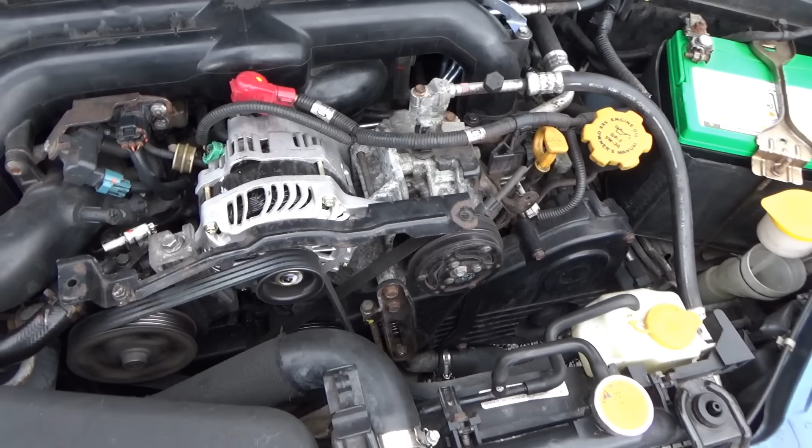Hook up the alternator. Wow. Okay, unhook it. Customer complaint confirmed. That's crazy. I've never seen this before on any vehicle.

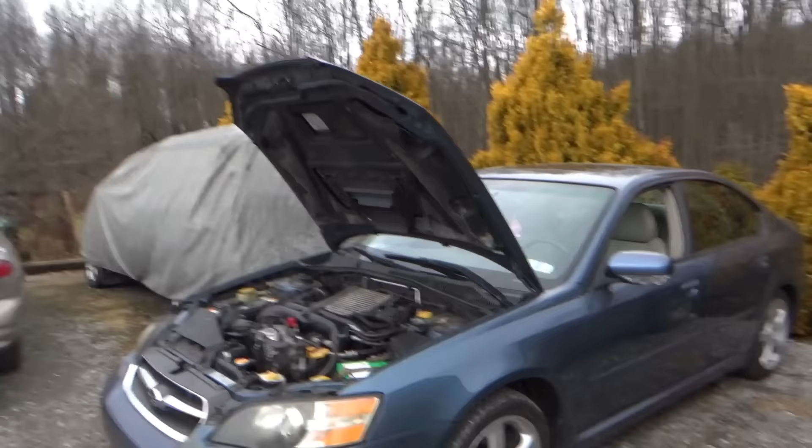So let's fire it up. And they said this connector right here, if you leave it unplugged, it runs fine. It runs smooth. Obviously it doesn't charge. Once you hook that up, well, you'll see in a second.

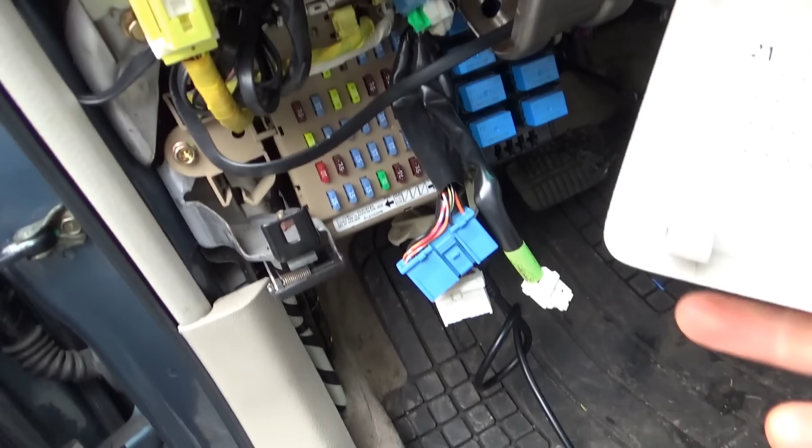Another note was it has a parasitic battery drain, and the owner tells me that if you pull out this 15 amp B unit B plus fuse right there, the draw apparently goes away. So that's the information I have.

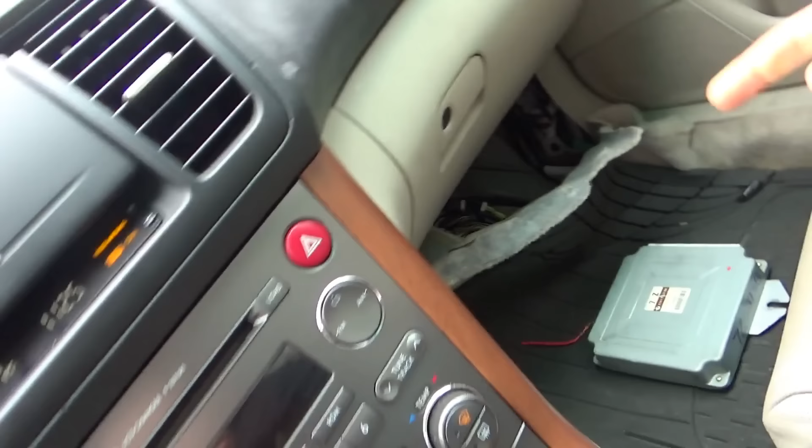Let's start it up. By the way, he said they replaced the engine computer with a junkyard one, again, no difference, and apparently this one's not original either. So, like I said, this car has a long history. So let's fire it up.

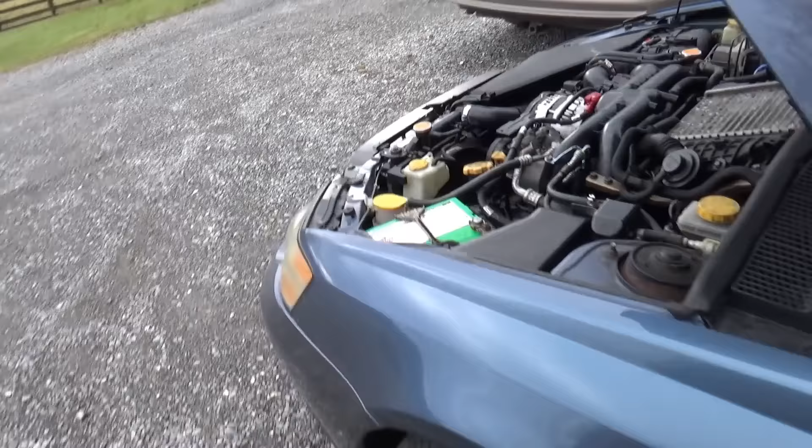Sounds just normal, sounds fine. Hook up the alternator. Wow. Okay, unhook it. Customer complaint confirmed. That's crazy. I've never seen this before on any vehicle.

Let's scan it for codes, just to get that out of the way, health report. And then look up a wiring diagram and see what this charging system is, how it's laid out. But what the heck is going on with this Subaru?

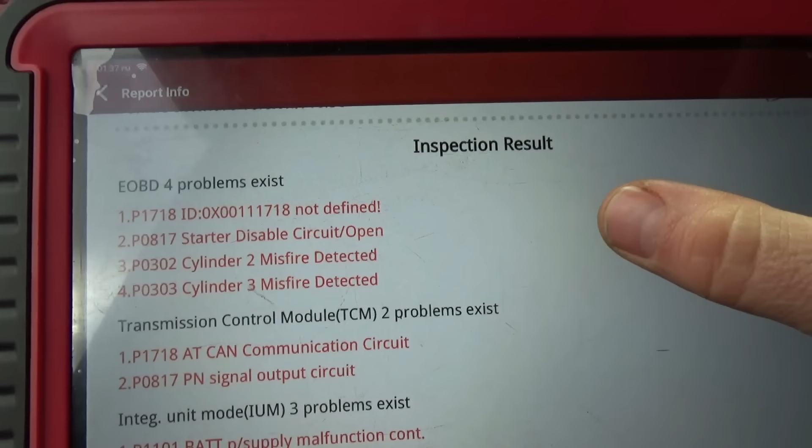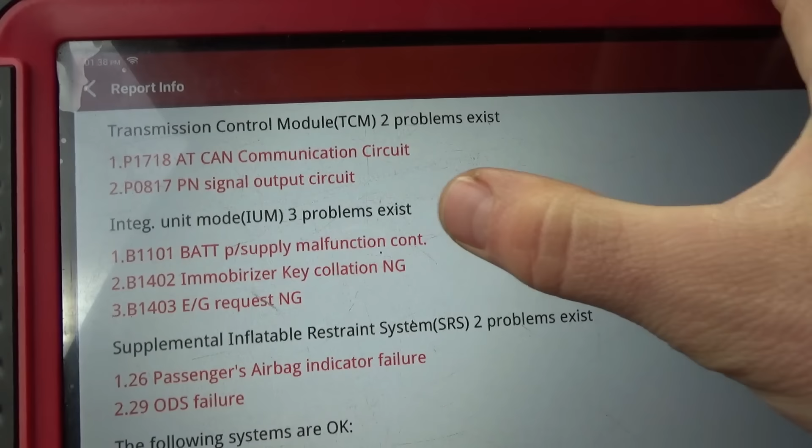Alright, we're inside my office here. So, full code scan. Cylinder 2 and 3 misfire detected, communication circuit, battery power supply malfunction. Okay, fine, not too interesting.

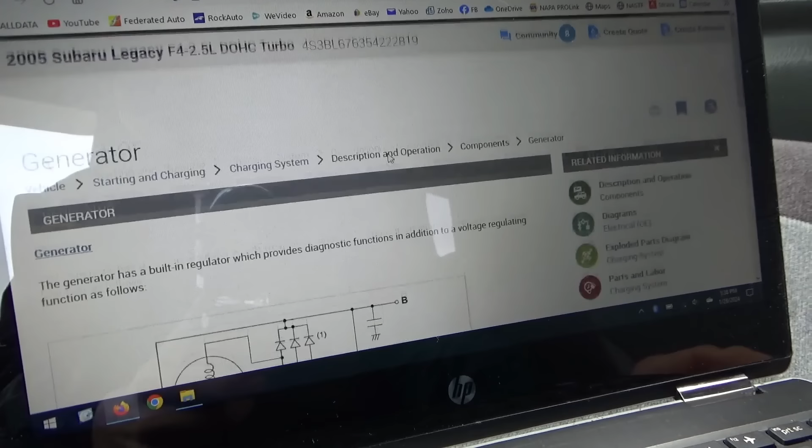Pull up some service info on ALLDATA. Here's our charging system description: alternator, the regulator, the main battery positive cable, and 2 terminals L and S. So we need a wiring diagram. Here it is, charging circuit. So there's our alternator, the fat cable, and then 1, 2, 3 wires on the control circuit. And it says this is for a 3-liter. That's not what we have, so we should only have 2 wires, I guess.

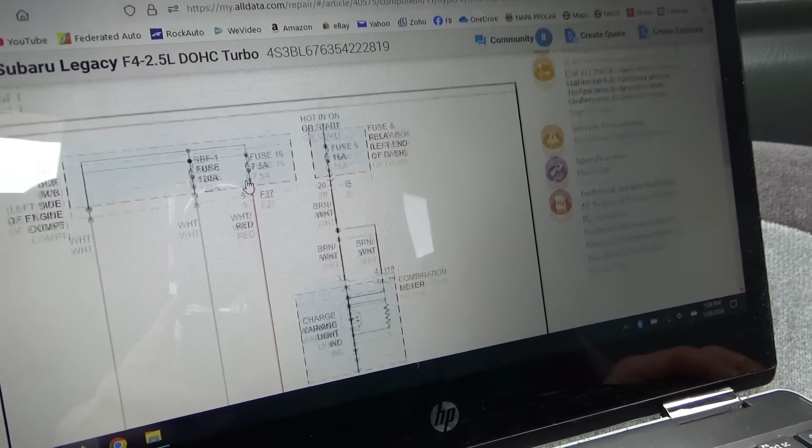One of them goes to a fuse, hot at all times, 7.5 amp, fuse 16 in the main fuse box, engine side, under the hood. And then there's our charge warning light, brown and white wire.

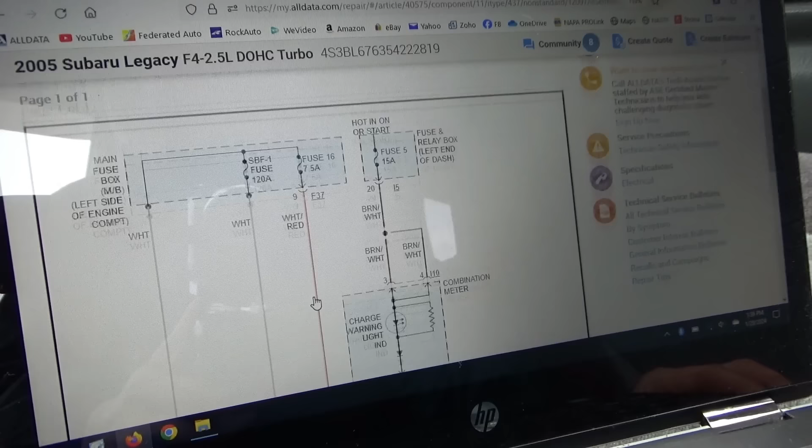So let's pull up the OE diagram, make sure we don't have this third wire on there. This is a pretty simple schematic. It's not computer controlled. I guess on the 6-cylinder it might be, but it shouldn't have anything to do with the computer. So why is it running really poorly? My gut feeling says, is there a massive ripple coming out of this aftermarket alternator? Perhaps. We'll get the scope out, see what happens when we plug in that connector while it's running.

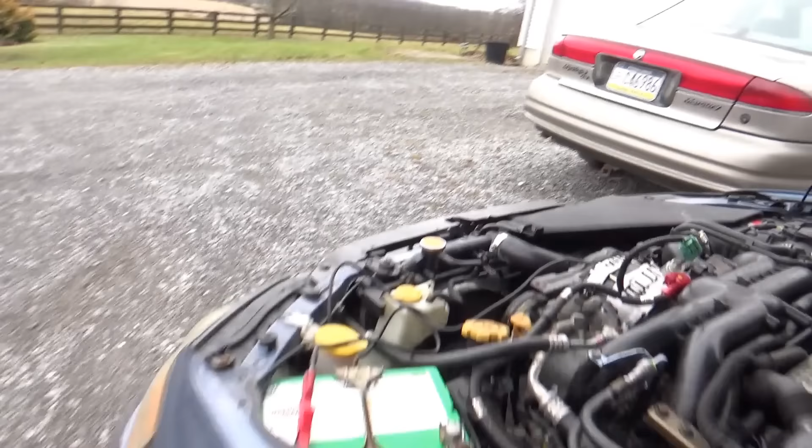Pretty crazy stuff. Alright, so with the key on, test light to battery ground, you can see it's a dim light on the brown and white wire, which is for the battery warning light. There's the battery warning light right there. If we take the test light away, that battery warning light should disappear. Indeed it does. And then the middle pin, we should have a bright light, power at all times.

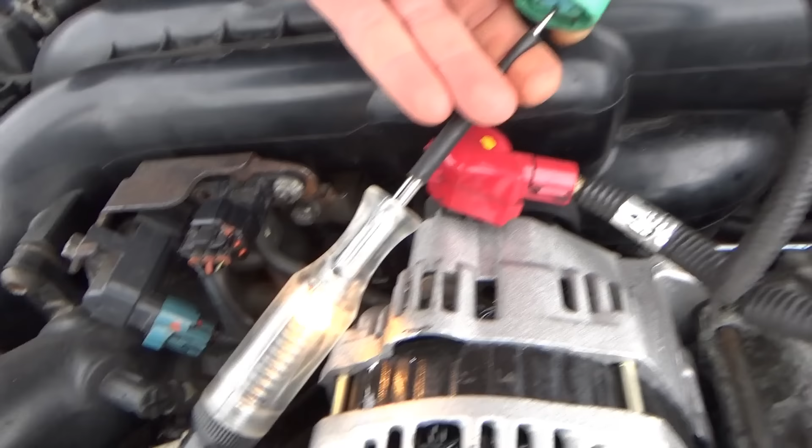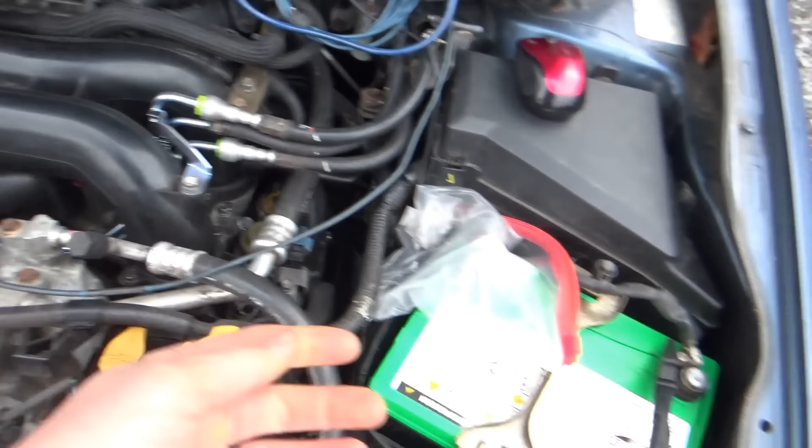Yes, that's there. Next check is, let's put a scope right on this post right here. Okay, so scope, just one channel hooked up to the battery positive post, negative on the negative battery terminal. We're at 12 volts right now, nice and steady. Let's run it, connect that connector, and see what happens to our main system voltage. Let's see.

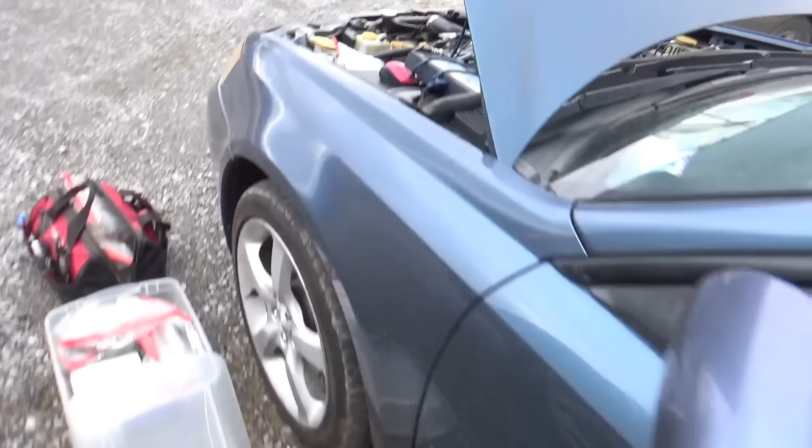Ready? Let me rev it up a little bit. System voltage did go up. Seems like it's only running on 2 cylinders. And unhook it. Nice and smooth.

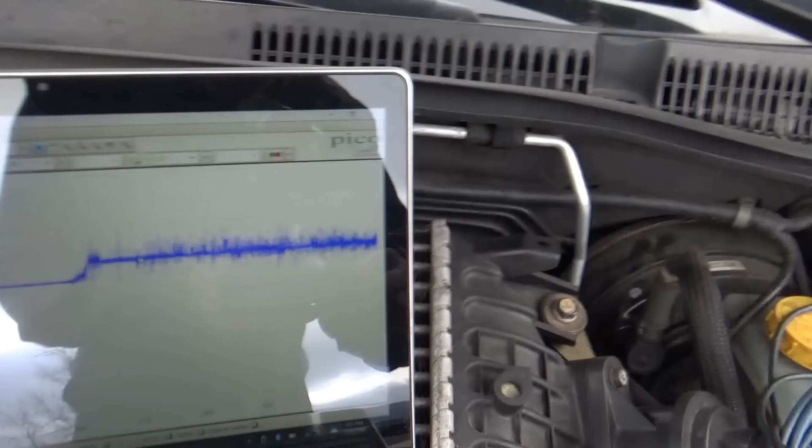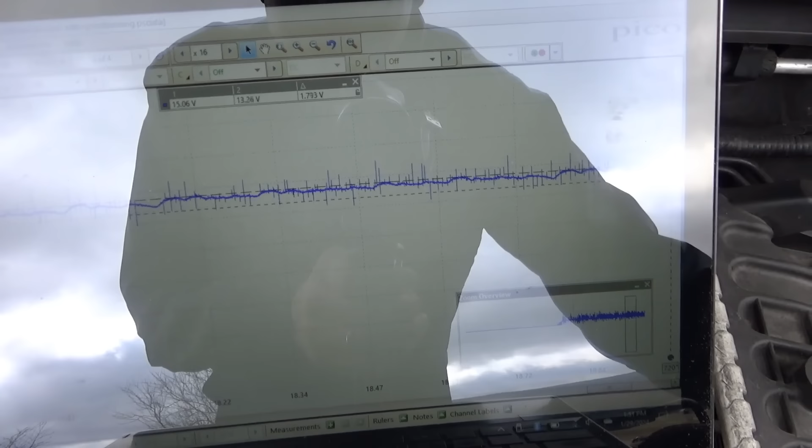Alright, okay, so the alternator seems to be doing what it's supposed to. There's no excessive ripple or anything. So you can measure the highs and the lows here. About 15 volts. That should be 14.3. Let's go to the next screen.

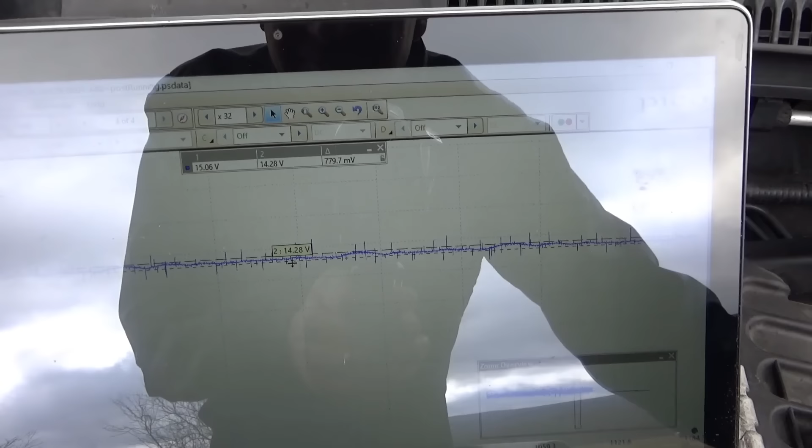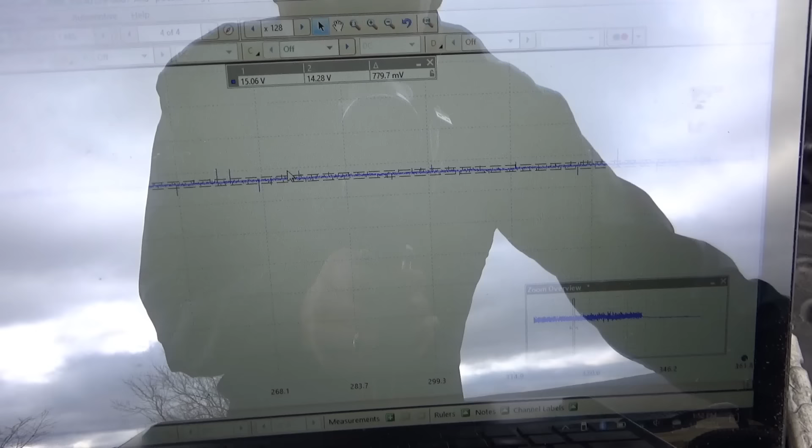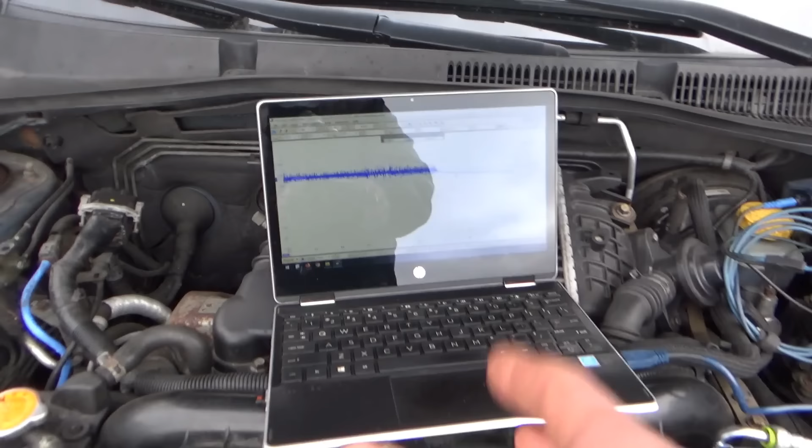This is where I revved it up. The engine's running really poorly, keep in mind, so the voltage could fluctuate a little bit, but it's not going above 15, about 14.5 volts. No excessive noise or spikes or anything. Like right here, it looks pretty smooth, doesn't it? Where it runs really poorly, the RPMs drop, so the alternator output is also dropping. That's not a diode going bad or a severe ripple or something.

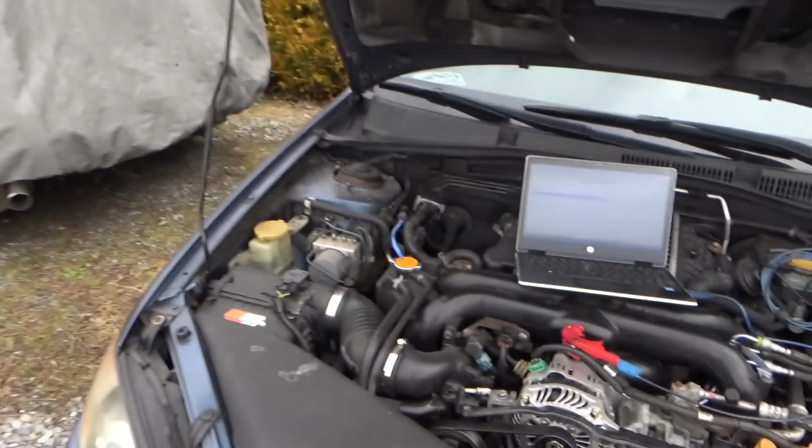So what is the next step in the diagnosis? We figure out what's going on with the input for the fuel injection and ignition systems. So the crankshaft position sensor lives right under the alternator, right here. Now we didn't have a code for crankshaft position sensor or anything like that, but we have access to the engine computer right here by the passenger's feet.

So I want to measure that, and maybe a ramp of the ignition coils. If we see 4 even humps, then it's running smoothly. If it's all over the place, we'll see if something's being interrupted, possibly from a messed up crankshaft position sensor signal. So that'll be my next check.

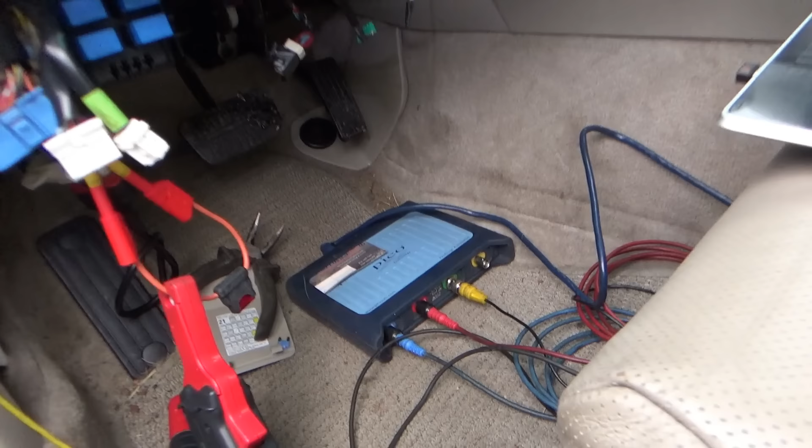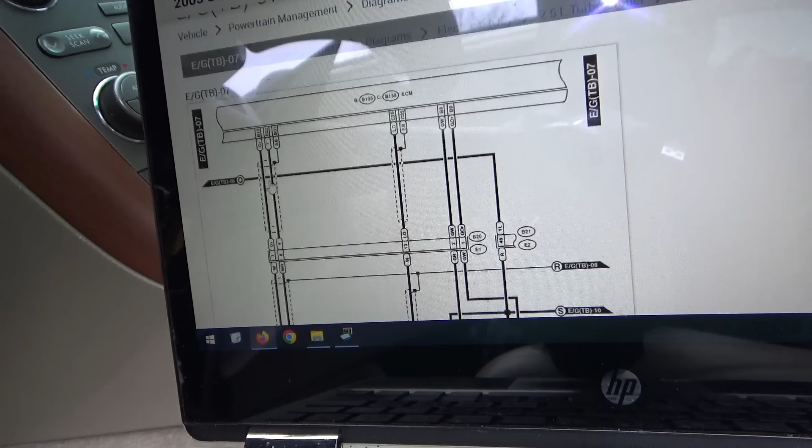Right, ready for the next experiment. Picoscope's hooked up, 3 channels. Channel 1 and 2 I have on the crankshaft position sensor wires. This is a 2-wire CKP, I guess it's a variable reluctance sensor. You should see it like a sine wave. Both of these wires go to the ECM. So I have channel 1 on the orange wire, B10, channel 2 on the yellow wire, B22. They're right there at the engine computer.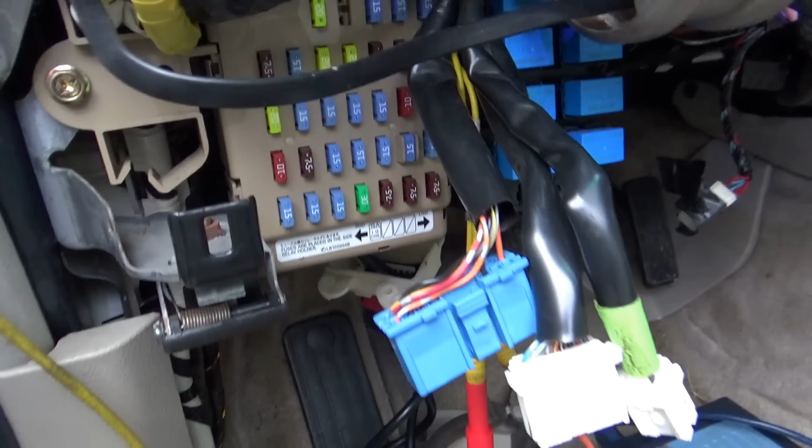Third channel is an amp clamp on the fuse that feeds the ignition coils. You have 4 ignition coils, and the power feed comes from fuse 12, 15 amp. So I want to see when we start the car with the alternator unplugged, nice even coil ramps, nice crankshaft position sensor signal. So let's just fire it up, see what happens.

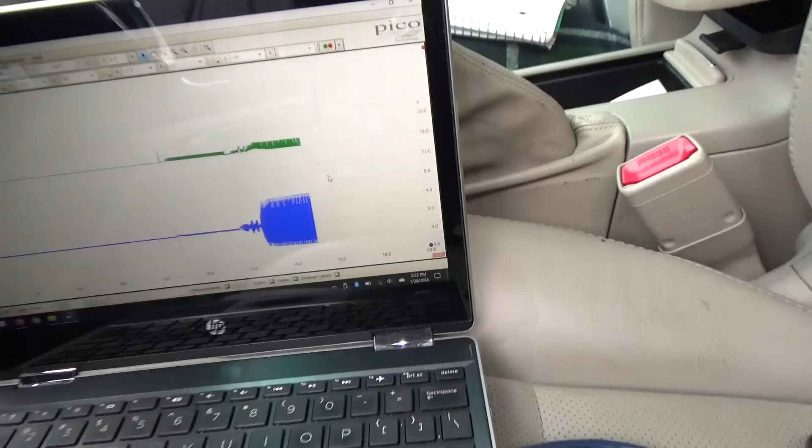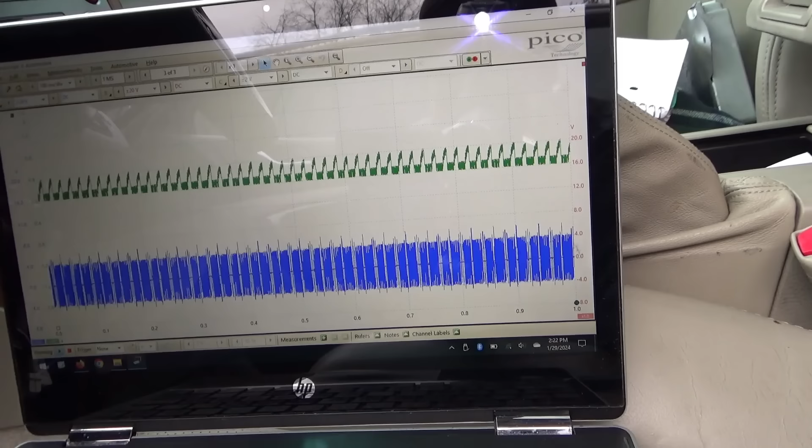Let's bump up or turn down the scale. Yep, we see nice coil ramps. There's our CKP signal, and I guess channel 2 is a ground. If we stop the recording, there it is. Okay, great.

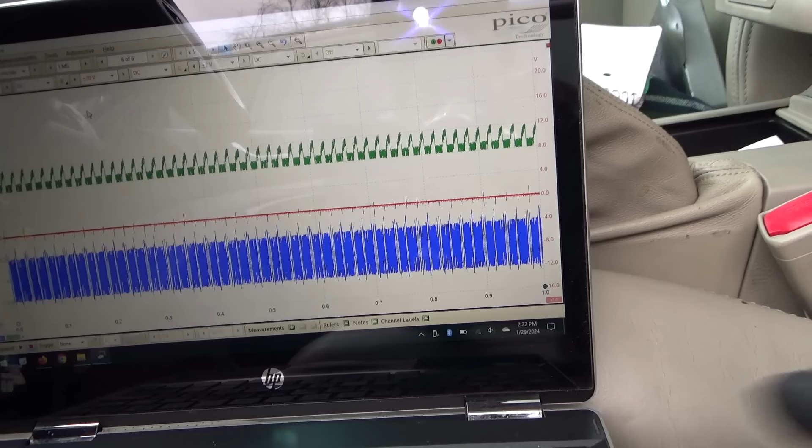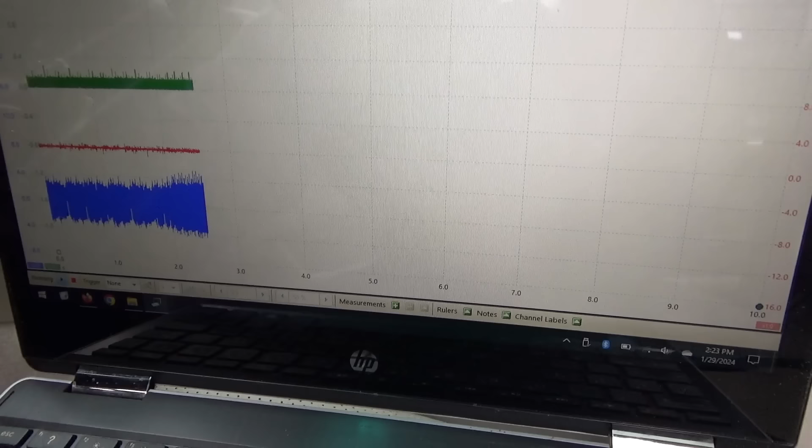I'm going to bump the time scale up again. Let's rev it up. Plug in the alternator, see what changes. Car is barely running. And we'll shut it off.

So where did we plug in the alternator here? It was running nice and smooth. See nice coil ramps right there.

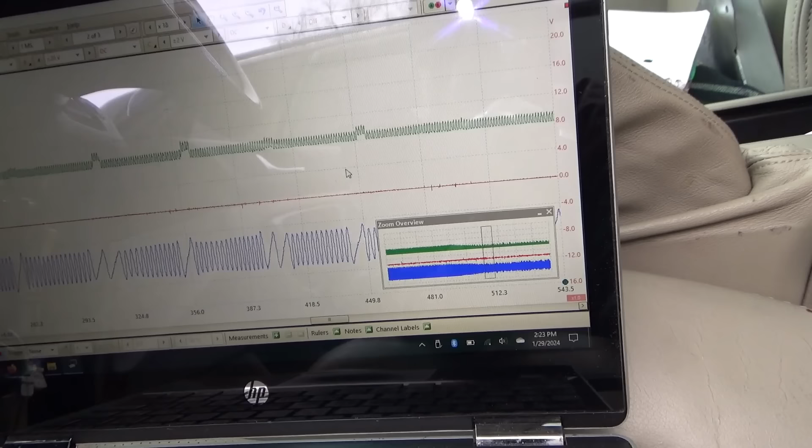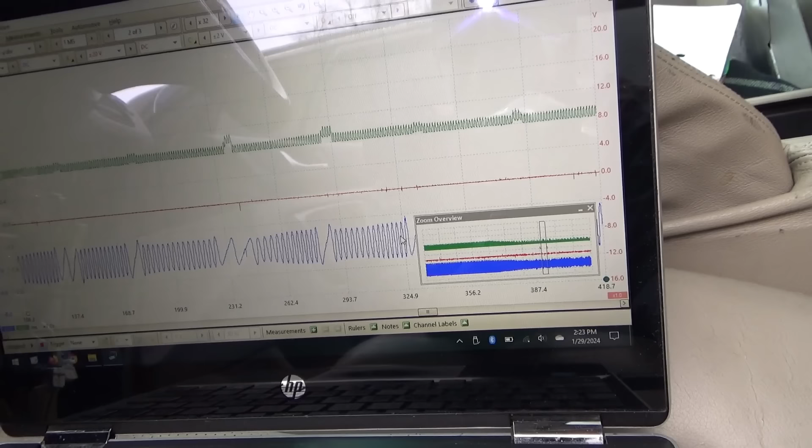Did the crankshaft position sensor signal change at all? So we have 1, 3, 1, 3, 1, 3. Doesn't look like it changed much, it just got weaker for sure. What happened to our engine computer? You can see the coil ramps are now boom, boom, and then kind of missing, or weak and weak. 1, 2, weak, weak. This is no good.

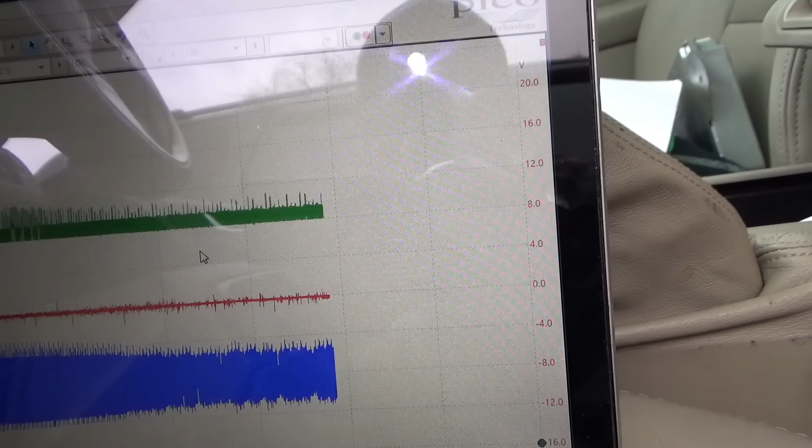Very, very neat, I like it. Like I said, crazy Subaru. What would cause this?

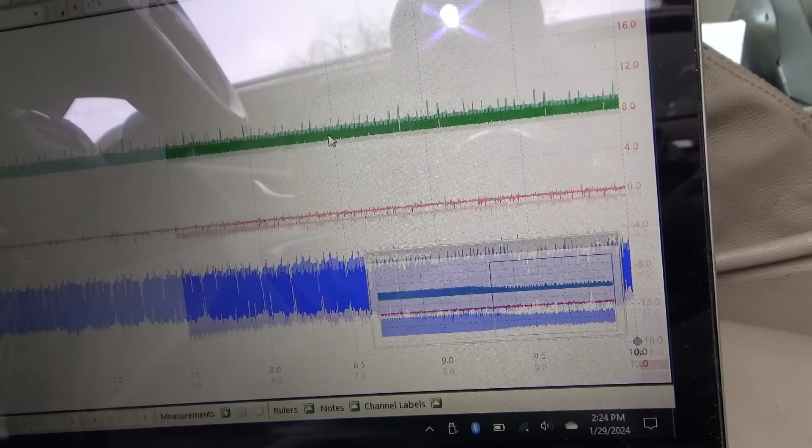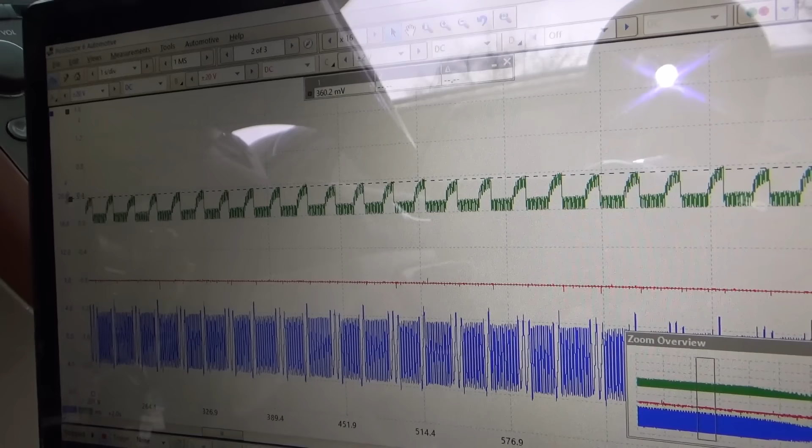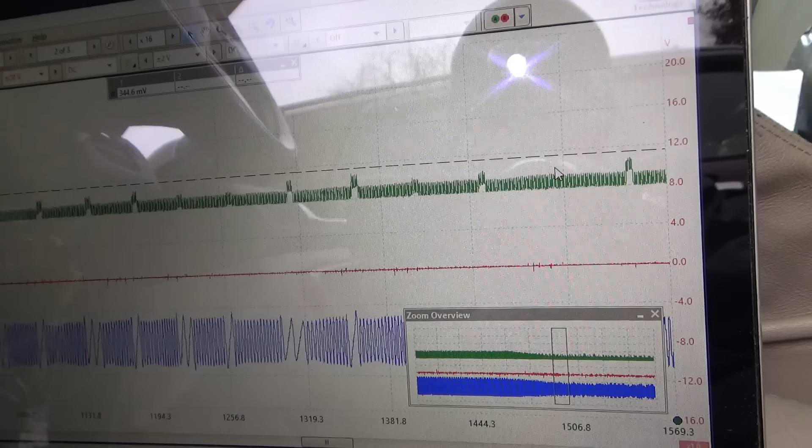So you see the current here is reaching about 360 mil, so 1 volt is 10 amps, so it's peaking at maybe 4 amps. And the ripple there, that's something else in that circuit. But nice and even. As soon as we plug in the alternator, that current goes way down, way down.

Is it possible that the ground for the ignition coils is being affected? The computer's trying to fire them, it looks like. There's still a little bit of a current ramp, but when the alternator kicks in, it might load that same ground that the ignition coils are using.

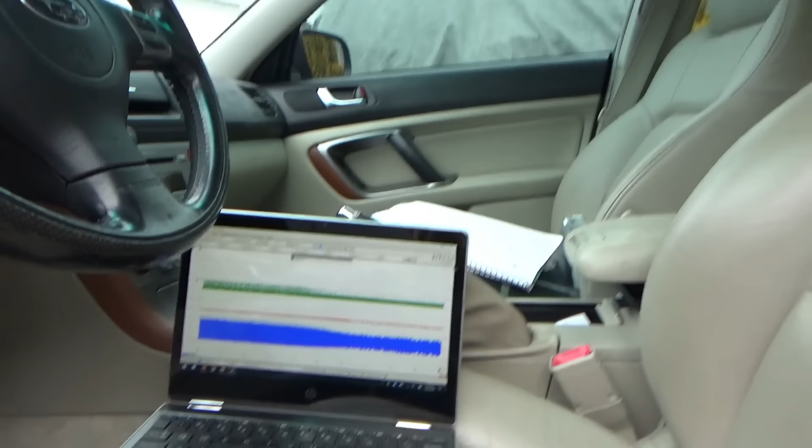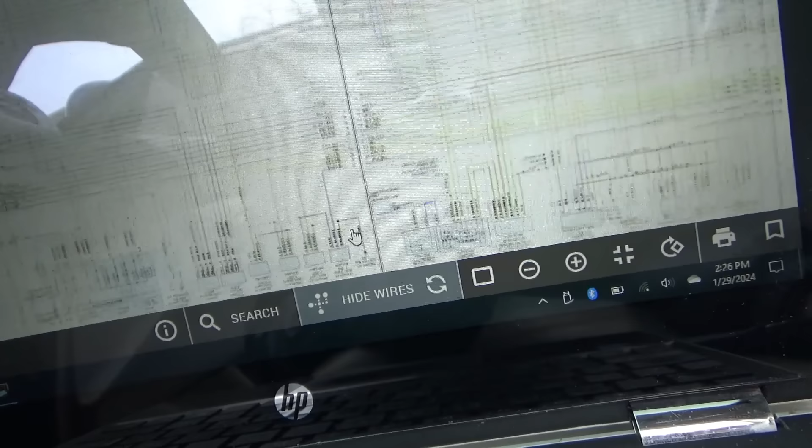Let's double check on our wiring diagram. Again, go to the ignition coils, right there, on top left of engine. GE1 — where is GE1? On top left of engine.

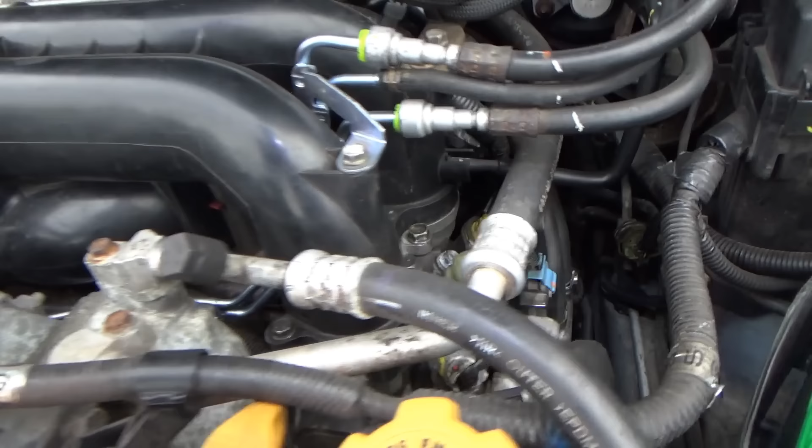A crusty ground somewhere. I see brand new fuel lines. This is a northeast car, so bad grounds are a possibility. We could go to one of the ignition coils and see, okay, there's a ground stud right there. Maybe that's top left of engine on the head.

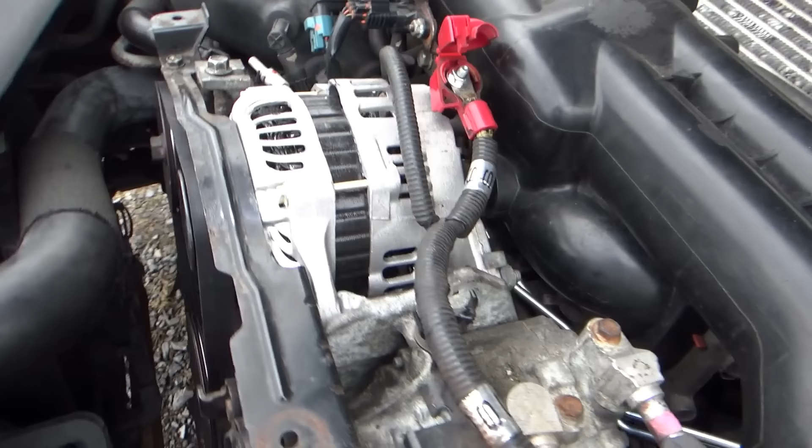Brand new coils installed. Yeah, we need to get to, we can measure the ground on the engine block, I guess, but even if the block ground is okay, I mean, it cranks up fine. So the main ground cable here that goes down here to, should go right to the engine block, right to the starter.

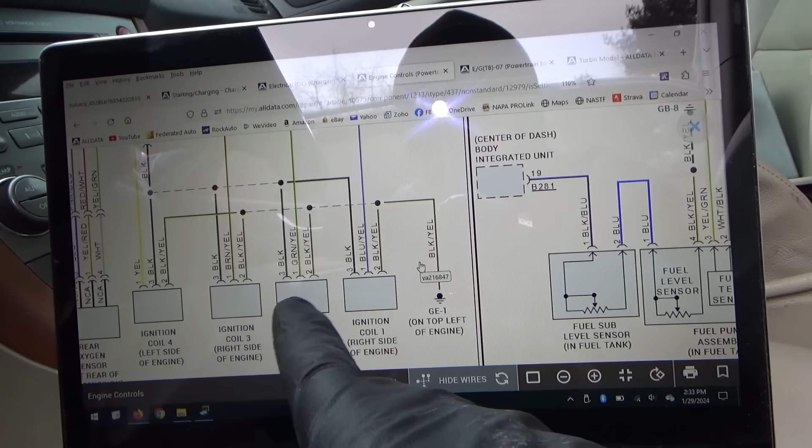Yep, there it is. You guys see that? That's the main ground cable. So I need to get to one of these ignition coils and measure the ground at the coil itself. Okay, so I want to measure the ground on one of these coils, black and yellow wire, middle pin, pin 2. Coil number 2 seems to be the easiest to get to.

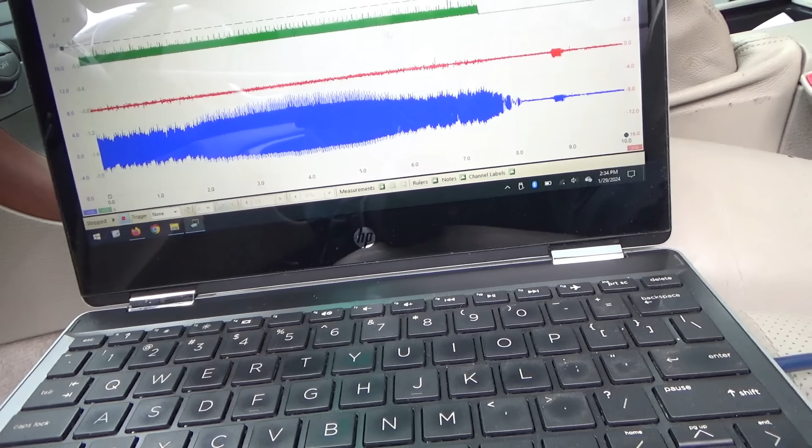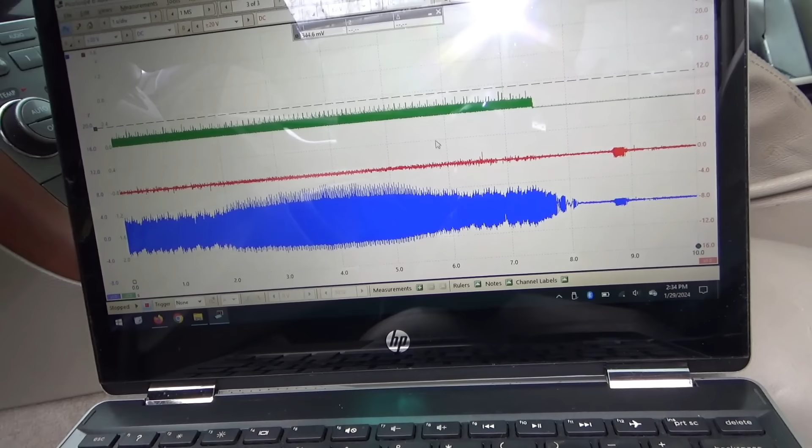So I got the connector off and I connected a piercing probe right in that black and yellow wire, and we're just going to use this extension lead. This is still the ground. So the yellow lead, I'm going to connect to channel 4 now, right there. And on the scope you want to set up a voltage scale, let's say, plus or minus — I don't expect to see more than a few volts on there, but it should be more than 0. So we roll the scope.

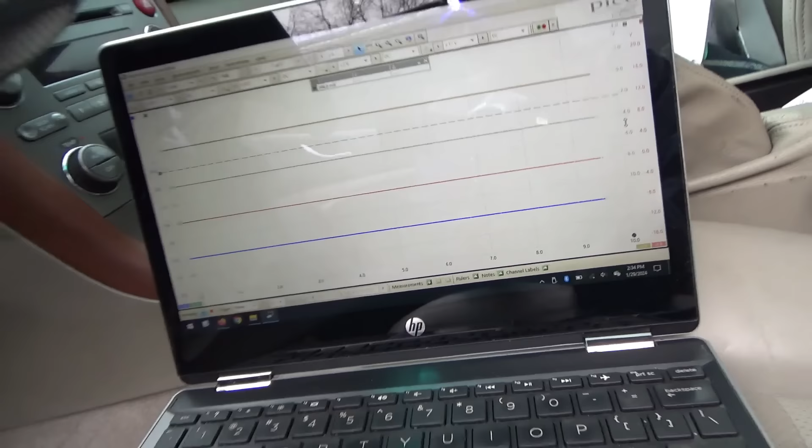Alright, so that's going to be our ground voltage. Let's unplug the alternator first, get this car running again. Now the battery is getting discharged, I don't have a maintainer on it yet. Let's close that up.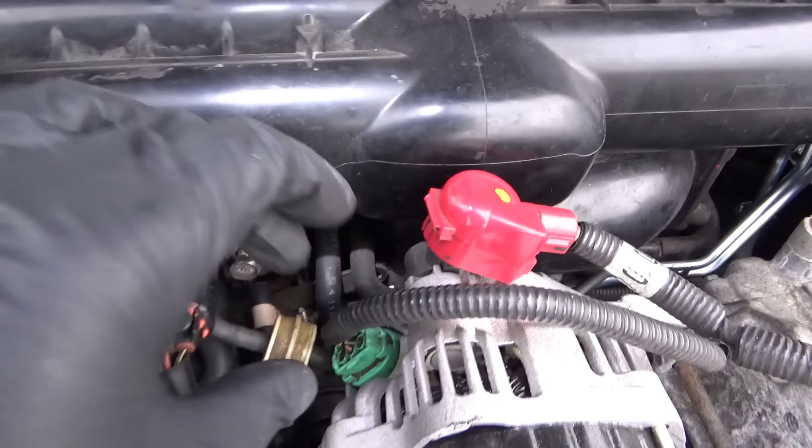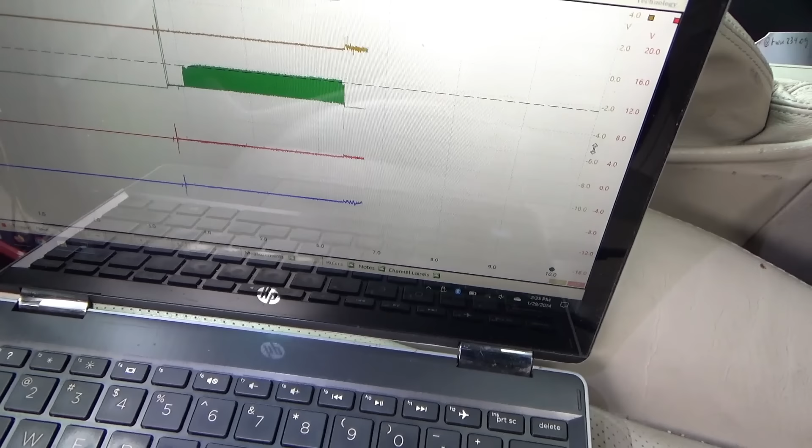Hopefully this is going to be the money shot. Alright, here we go. Need the maintainer. TOPDON Tornado 90,000 to the rescue. Let's set it to 13.5. Only 16 amps.

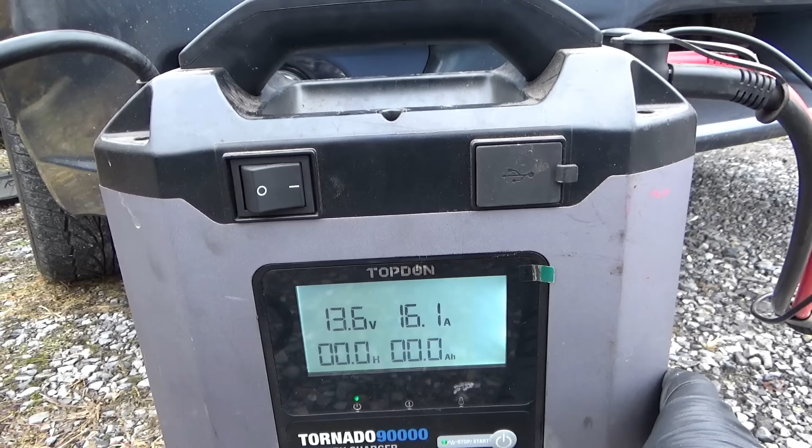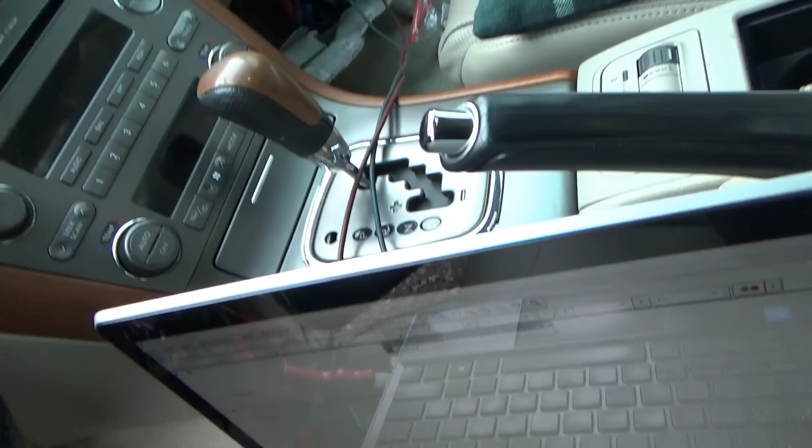That's interesting, I wonder why it didn't crank. Let's try again. Maybe it's a poor engine ground. Okay, there we go.

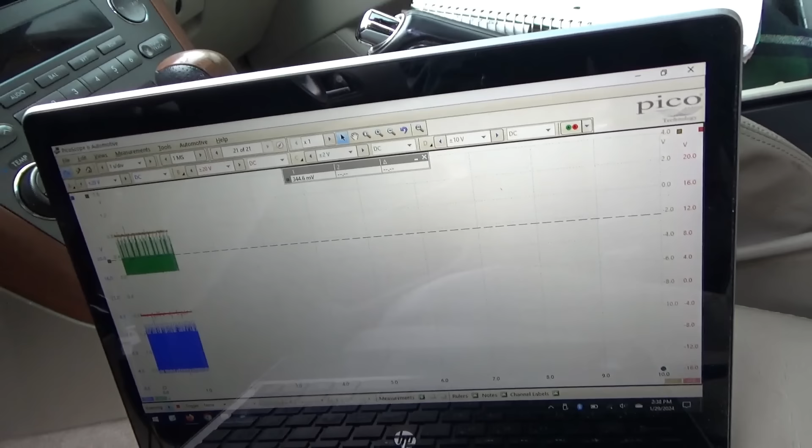Now is the alternator plugged in? Alternator is unplugged. Okay, let's try it, plug it in. Interesting.

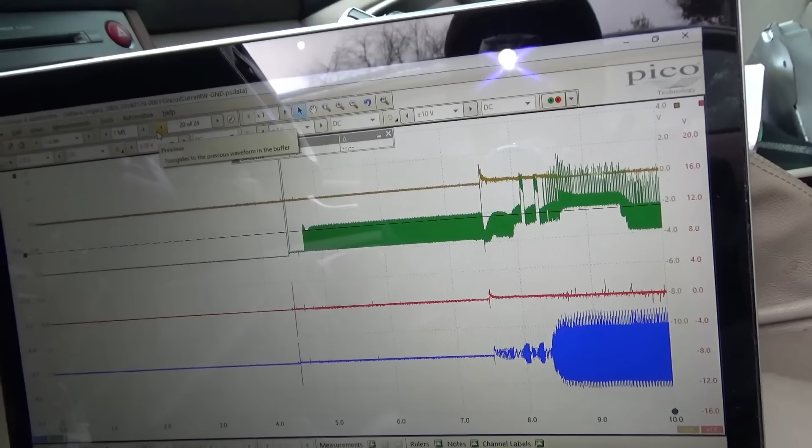Alright, let's analyze the data. So we start up, alternator's unplugged. Unplugged right here, I plug the alternator in. Look at the ignition coil ramps — they just drop off a cliff.

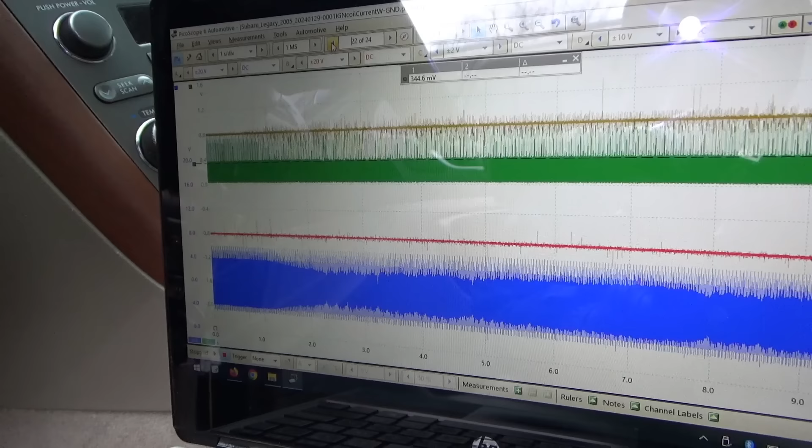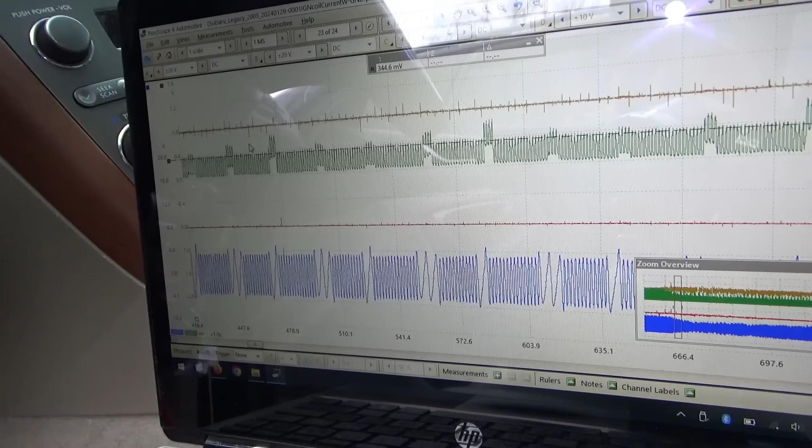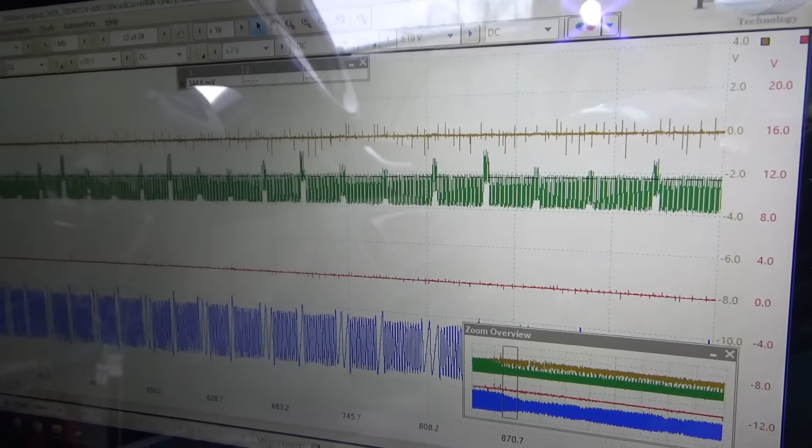What happens right here? It's very repetitive too, it's like missing, missing, halfway there, good. Missing, missing, halfway there, good. It is running on 2 cylinders, you can tell. So it's not like all the coils are being affected. And the coil ground seems to be just fine. This is getting even more interesting now.

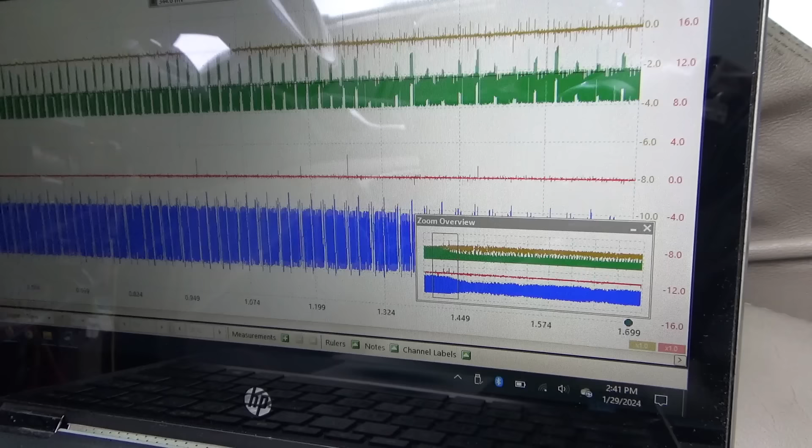Anything wrong with our crankshaft position sensor signal? Doesn't look like it. Wow, this is a crazy Subaru.